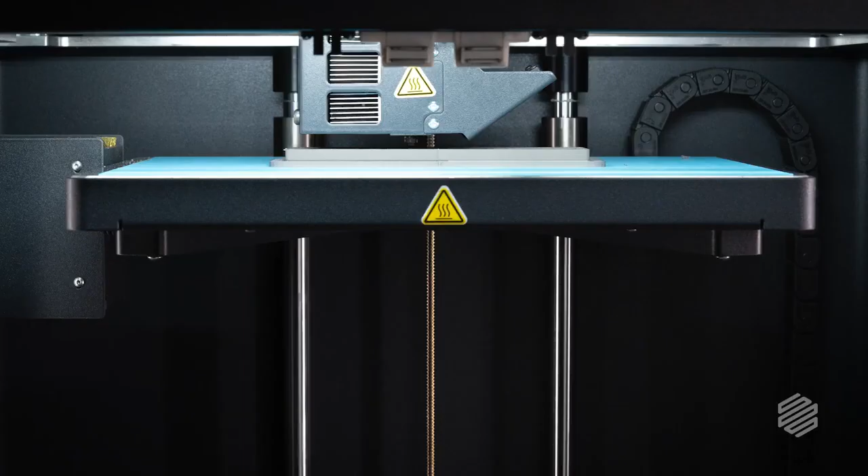Do you need to incorporate text onto your 3D printed parts? Whether you're printing a serial number for part identification, incorporating tool instructions, adding your company logo, or even just want to inscribe something fun, the print quality and legibility matter.

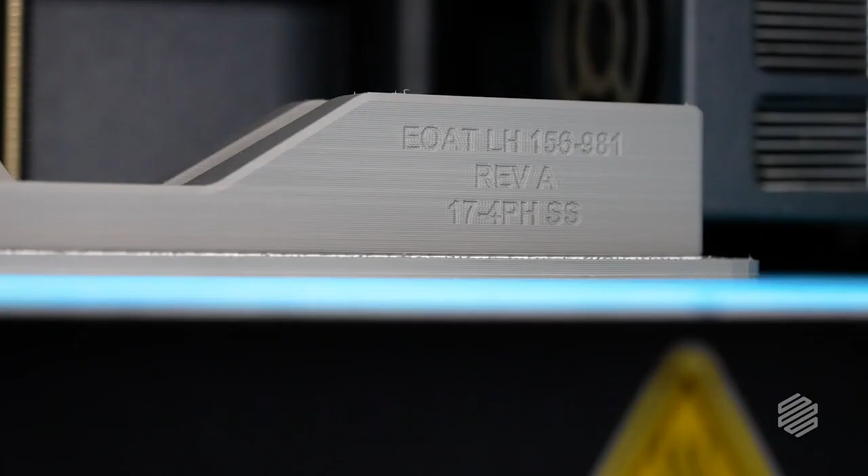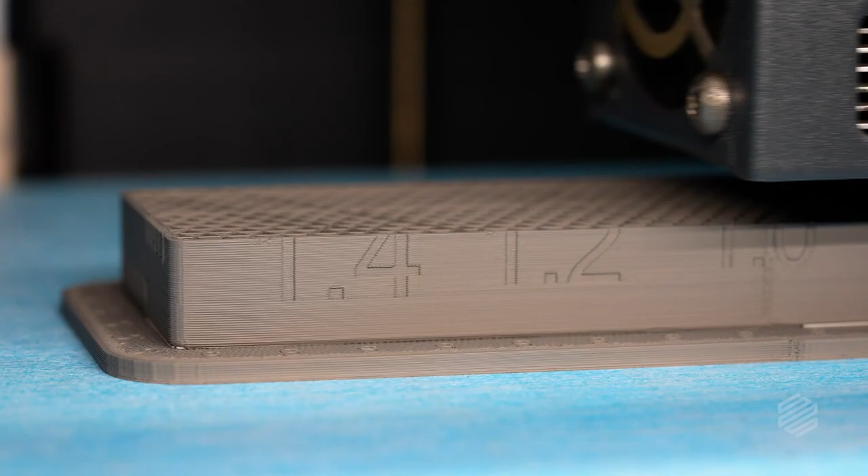Today, I'm going to show you my best practices for designing text onto 3D printed parts. We're going to take a deep dive into Fusion 360 and go through my design intent step by step, and ultimately arrive at an optimized 3D printed part with text features.

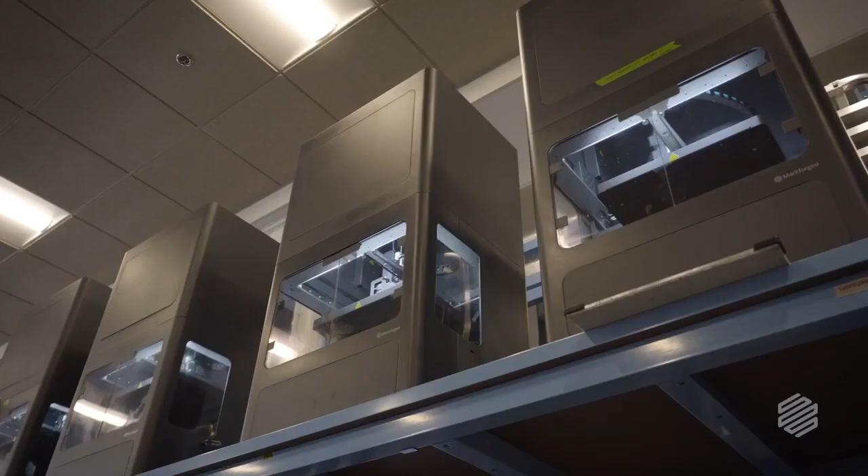Before I get started, this part that I'm showing you was printed on Markforged Metal X in 17-4 stainless steel. But the same design principles should transfer over to most other FFF 3D printers and the materials that you're using. I'm Ross, and this is Reinforced.

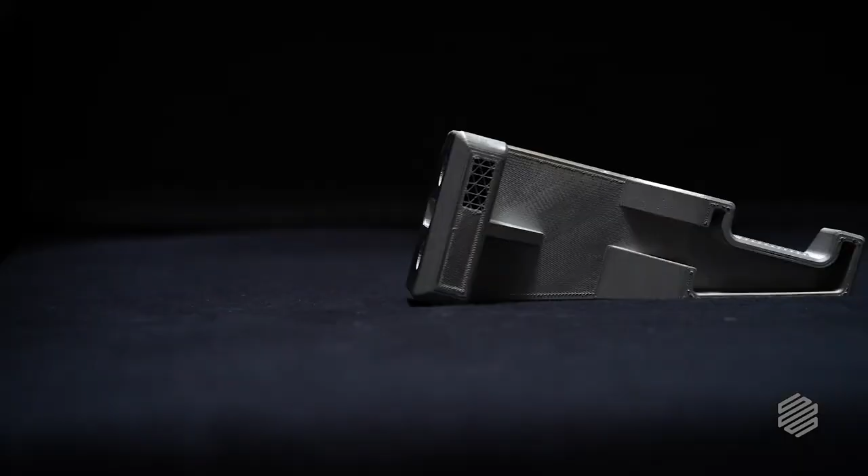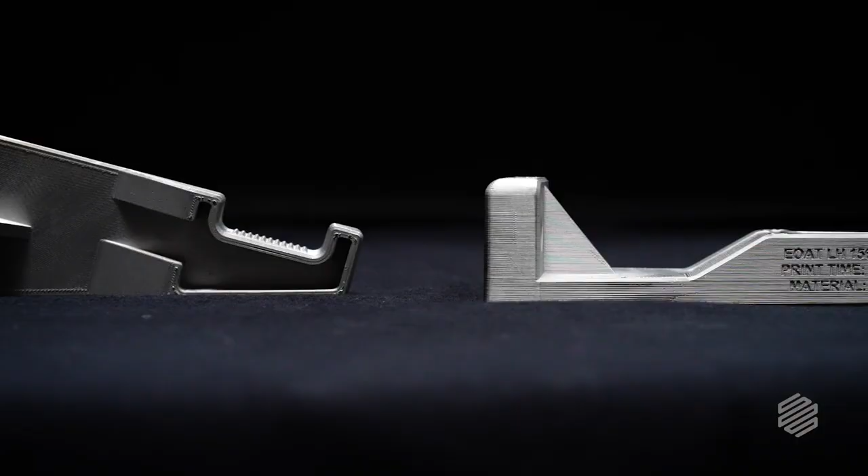Now we're in Fusion 360. What we're looking at here is an end-of-arm tool and gripper, and the bulk of the design is complete. But the last thing that we need to do is to add our text that will include our tool number, revision, and material that this part includes. We want to incorporate this into the print and tattoo it so it's permanently embedded into the part itself.

Being the last step in the design process, we need to pick where on this part we add the tool number. We have three main locations: the first one's on the top of the part here, the second one's on the bottom, and the third is on this wall. All three of these locations will not interfere with the actual functionality of this tool itself.

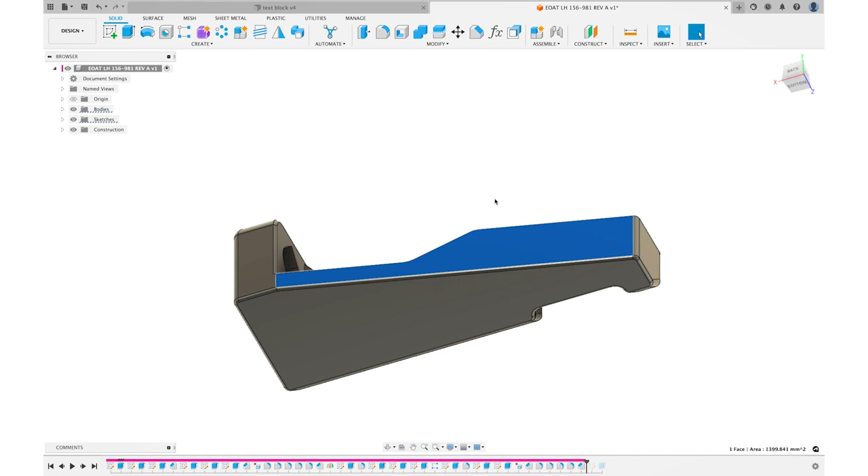So how do we think about which position is best for this text? Well, the first option is going to be this layer right here, and this is going to be our build surface that we have designed the part for early on. Since this is our first layer, it's usually not a position that you want to put the text, because the first layer is the most critical layer that determines the success of the subsequent layers later on. If we can avoid introducing more complexity into this layer, our print is going to become more reliable.

Now we have two remaining options for the location of our text: on the top of the part or on the sides of it. Both of these are more than suitable, but one's going to be better than the other. Let me explain why.

Now, a useful analogy for the anatomy of a 3D printed part might be a sticky note. Each individual layer is represented by a single sheet of paper, and each sheet of paper has a specific profile, which in this case is just a simple square. When you put all those pieces together, you get a block.

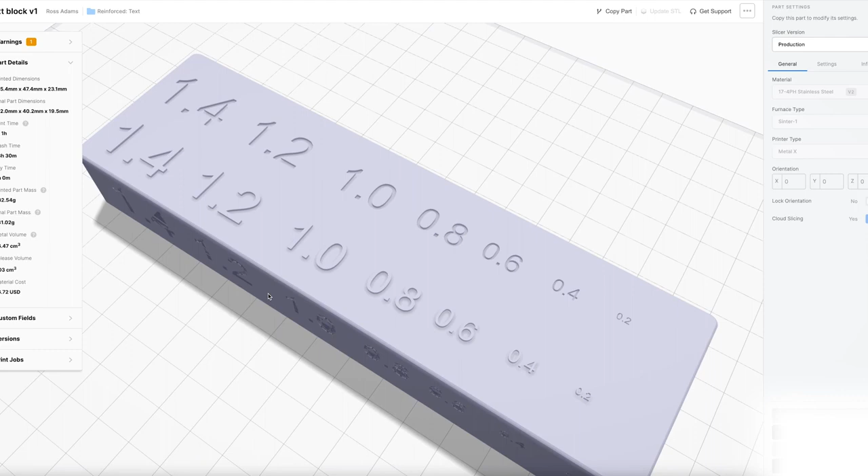Now, if we were to put our text on the top piece of this paper, the nozzle is going to have to draw that shape, just like you would do with a pen. If I want to draw a bunch of letters in very different shapes, I'm going to be limited by my penmanship, which has never really been my thing. And the smaller we get and the more detail we get, the less legible it will become.

But if we instead put the text on the side of the part and only make these small cuts into each profile of that individual layer, we'll get much finer resolution on the part and be able to go much further with the shapes and the sizes that we incorporate the text, so we're not trying to squeeze things into our design, as well as get letters and words that are legible to our machine operators.

So when we take this back into the part, since we have design freedom to choose there or here, whenever possible, it's better to design your text on the sides of the part than the roofs of your part.

So now that we've picked the location for our text, the next thing we're going to do is create a sketch on that plane, and we're going to use our text tool.

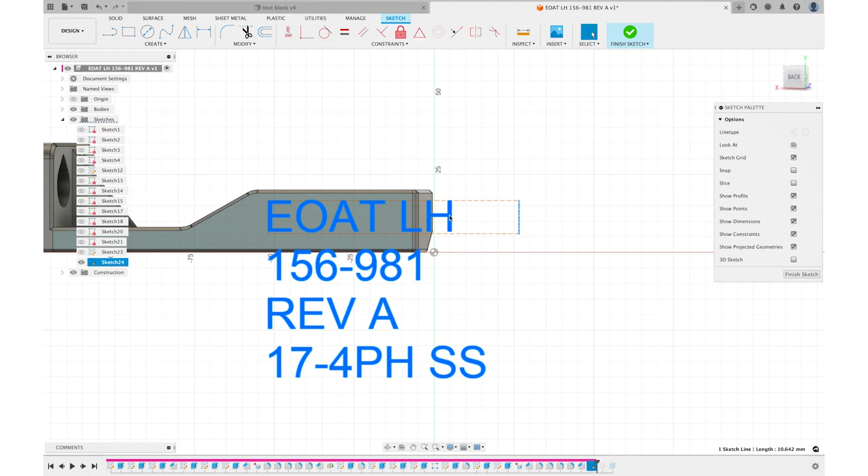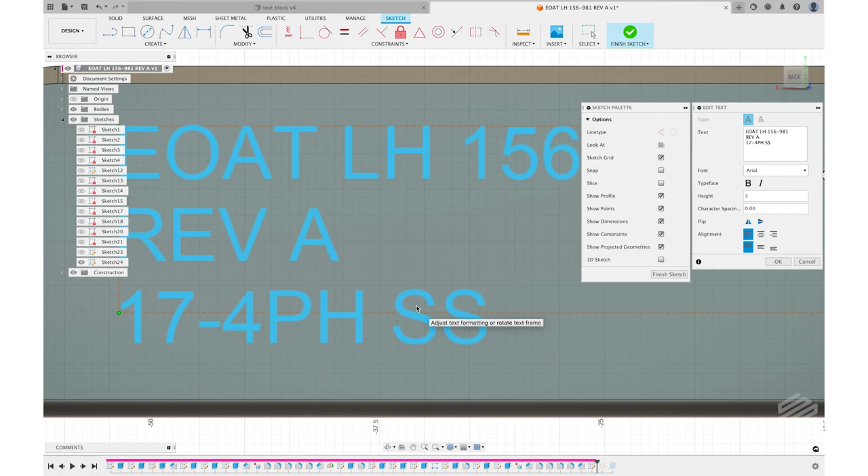And add the specific metadata that is relevant for this tool. We got to refine the size, space it out, go down to a certain size where it all fits into one sheet. So we picked a height of 3, and we're going to have some constraints here. The most specific one is going to be how wide of a letter we have in the distance between each shape.

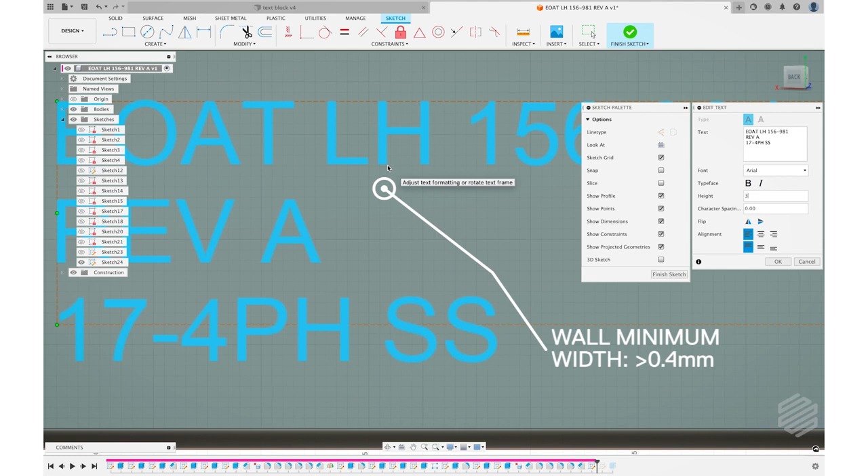So we put it on the sides of the wall, and we added our text. Now we want to make it as big as possible so it's the most legible, but we also want to make it small enough that it fits into this area. The smallest that we can go when we put the text on the walls is a width of 0.4 from one point to the next. If we were to put it on the roof of the part, the smallest that we can go is 0.6 millimeters. So putting it on the walls gives us more freedom to fit into smaller spaces.

Now let's move on to fonts. Deciding font can be a personal preference, but I tend to go with Rubik. It's common and it's pretty uniform all the way around. Helvetica, Arial, Verdana, these are great choices as well.

When you think about what font you want to use, try to make sure that it's uniform in dimension. Otherwise, you may get some inconsistencies in the printed result. And that's why I recommend sans serif over serif fonts. So for those of you that may not know, serif fonts have small lines attached to the ends of the letters. It may have different size weights per line, while sans serif fonts have none. Now, as I said, my personal preference is Rubik, so I'll select that and add it to our part.

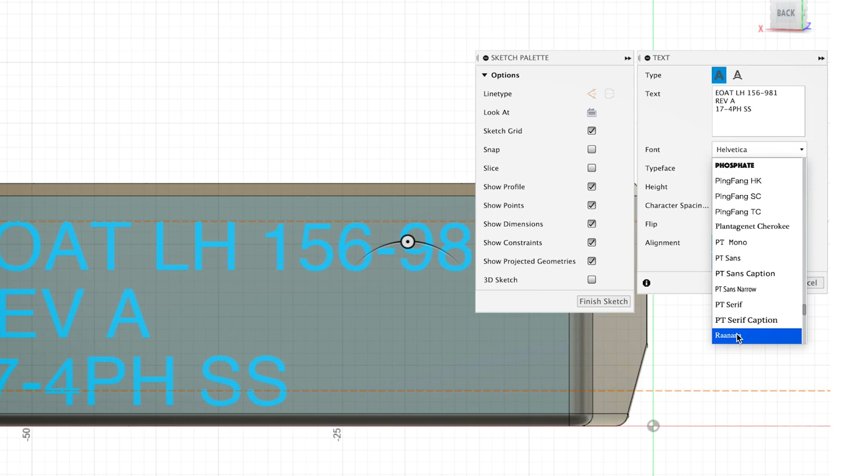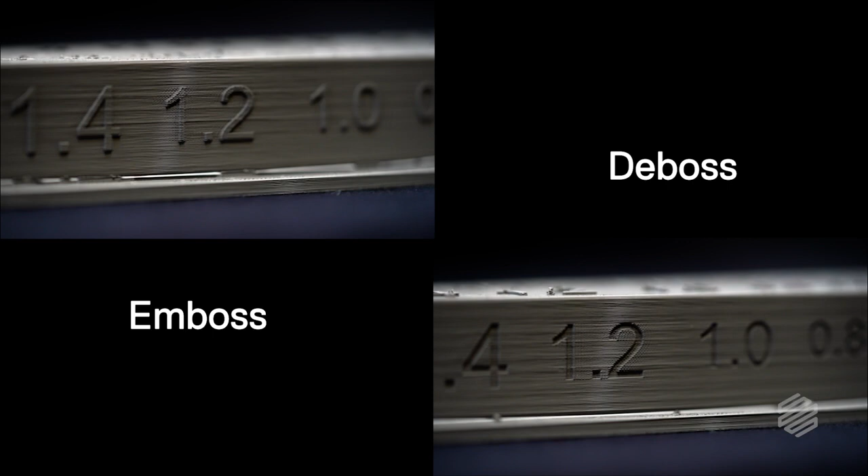So now that we got the text designed, we now need to turn this into a three-dimensional feature. And we can either extrude it out of the part, or we can cut it into the part. Emboss versus deboss. Now, both of these are viable methods, but the one thing that you want to consider is if you do extrude it out of your part, you need to ensure it's not going to interfere with any of the functionality of the application.

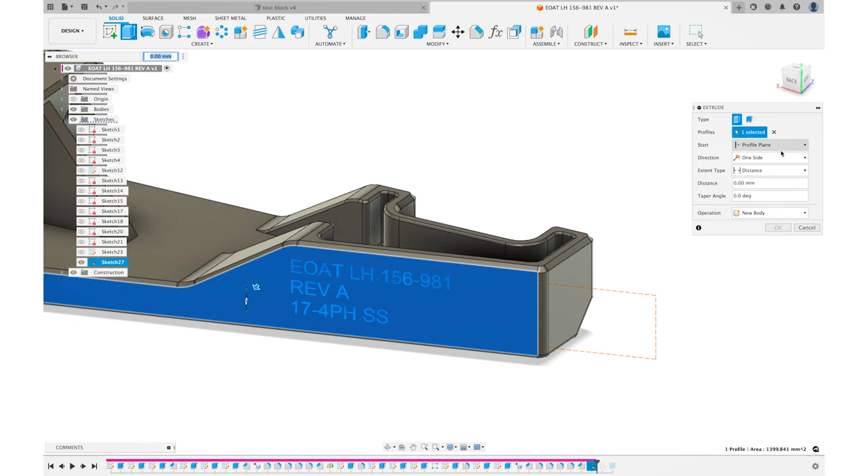I typically emboss. It just prints better because it will require less supports when it's designed to the correct depth of the part. Now, if we come to our part, we're going to select our text. And now the last design decision that we need to make, how far do we extrude it out? What I typically use is 0.25 millimeters. This is a very fine detail, but reduces the amount of overhang that the part has and will eliminate any need for supports. And this applies for both extruding and cutting into the part.

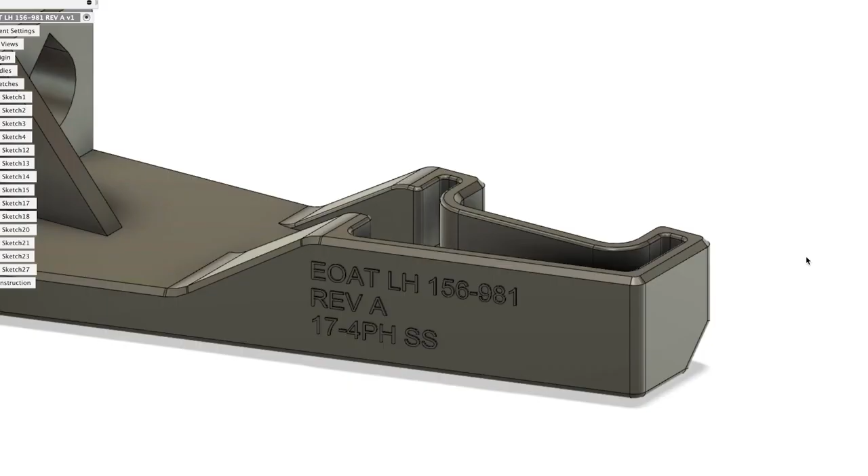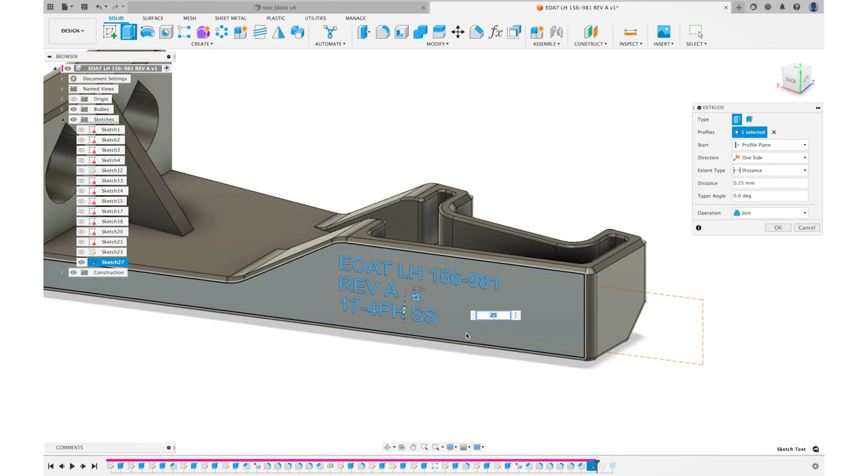You may go thicker when you cut into the part if you want to have better legibility and give some contrasting colors into the text itself. So we'll command Fusion to do 0.25, and that will generate this 3D printed boss. And now we have our three-dimensional shape tattooed onto the part, and this will permanently allow us to know exactly what part it is, when it was made, and what it was made out of.

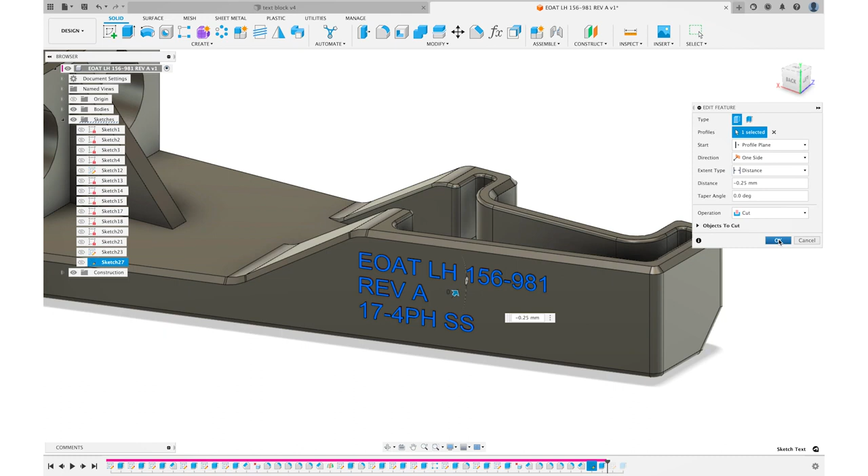Now, if your design calls for this part to be extruded into the part itself, the only change that we have to make here is change our distance from positive 0.25 to negative 0.25 and change the command or the operation to cut. And now we have the three-dimensional text extruded into the part. And that's it. We have our part designed and optimized to include our text. We're now ready to print. So why don't we recap what we just learned?

Be aware of how you plan to orient your part while printing. This will help dictate the placement of your text and help you decide where the optimal location is to place this. Now, my recommendation is to print your text on the walls of your part. This is going to give you the most amount of freedom and make it the most legible text. You can either emboss it or deboss this text. You're going to want to use a uniform font, preferably something that's a sans serif, and your font width should be around 0.8 millimeters thick, but no smaller than 0.4 millimeters. And now the depth that you extrude or cut it into should be about 0.25 millimeters.

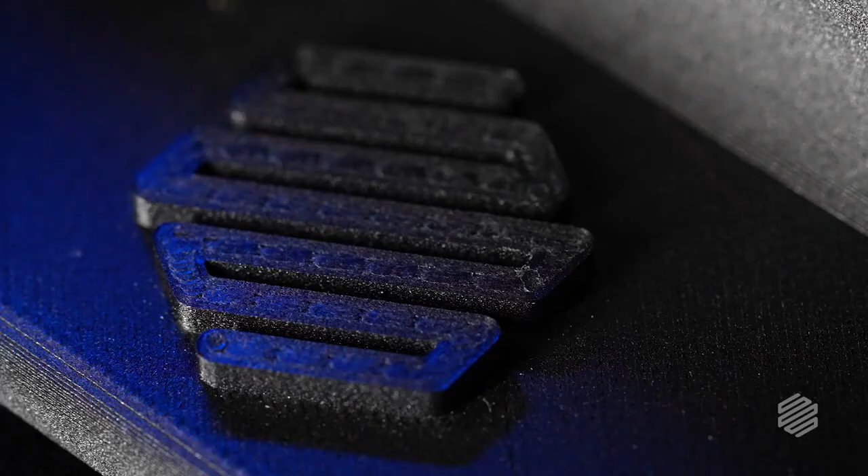Now you may go a little bit thicker when you're embossing your text, but be aware of how these supports get generated at those thicknesses. If you follow these rules, your design is going to be looking sharp and it's going to have minimal post-processing after it's done printing. Now, for those of you that have design constraints and are absolutely required to put the text on the roof of your part, I'd first recommend embossing this text. My font recommendations still apply.

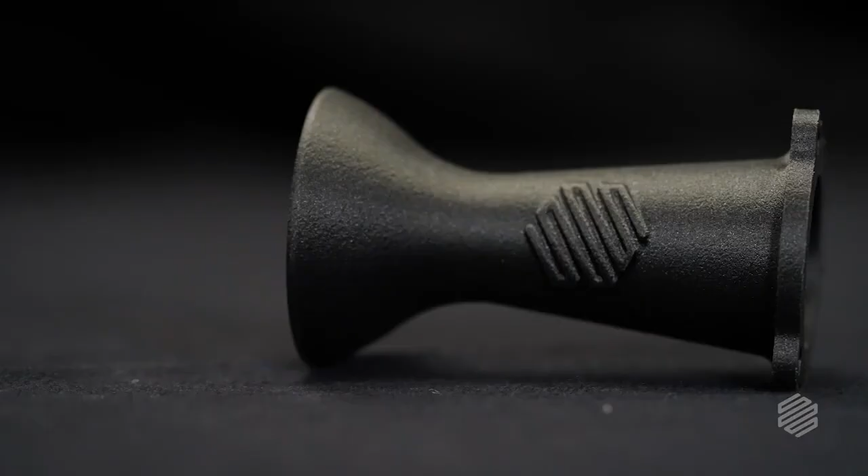However, the width of this font should be increased to around 1 millimeter to give it a thicker profile and make it easier to print. So when you're on the roof, the depth should be about 2 to 4 layers thick. Depends on your layer thickness. And lastly, if you're printing logos or other types of design features, all these tips should apply seamlessly. Get creative with it.